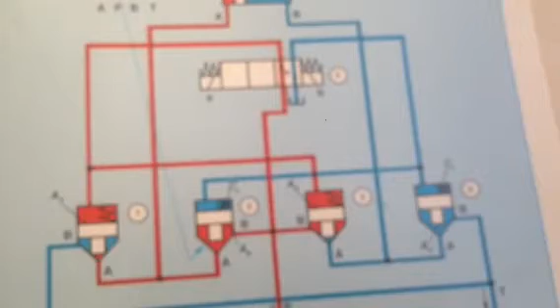Of the logic elements 1 and 3, which thus remain closed. The control areas of elements 2 and 4 are simultaneously connected to a tank via the pilot valve 5, and are therefore at zero pressure.

Now we are extending the cylinder using a single pilot valve. Before we have used several pilot valves. In this example we are only using one pilot valve.

The pressure on the annulus AB of element 2 moves the poppet upwards against the spring C2 and opens the flow path from B to A to the cylinder bore.

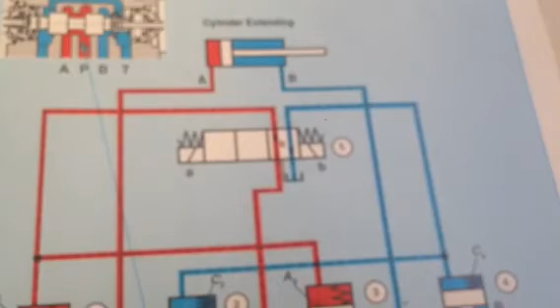The cylinder extends and the fluid flows from the cylinder annulus areas via the logic element 4, by opening the valve via area AA against the spring C4, to the tank.

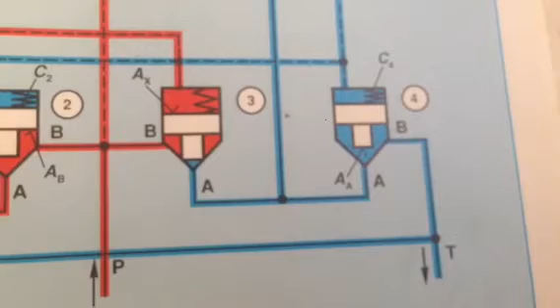If one once again makes a comparison to the directional spool valve, then the opening of the logic element 2 corresponds to the connection P to A in the directional spool valve, caused by the control land opening.

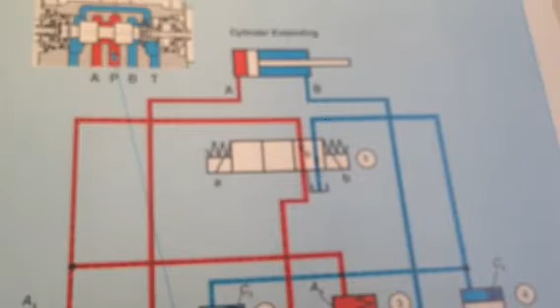Now this is the example of using a single pilot valve with 4 poppet valves, 4 cartridge valves, for the cylinder extension.

And furthermore, I'll give you some idea of the forces operating on the poppet of a logic element.

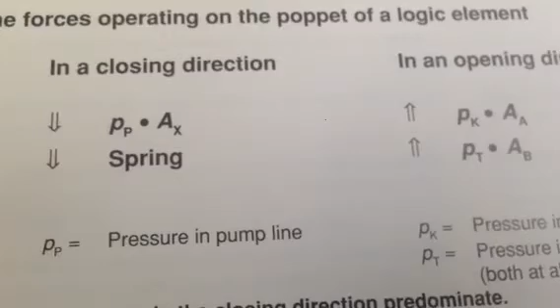In a closing direction: PP into AX, and spring. PP is equal to pressure in the pump.

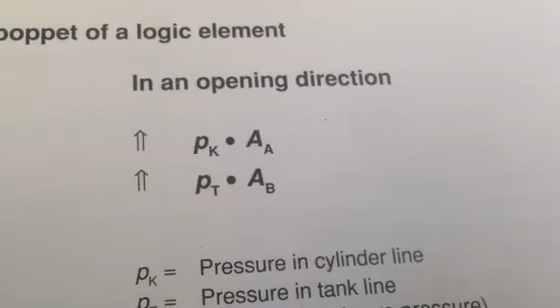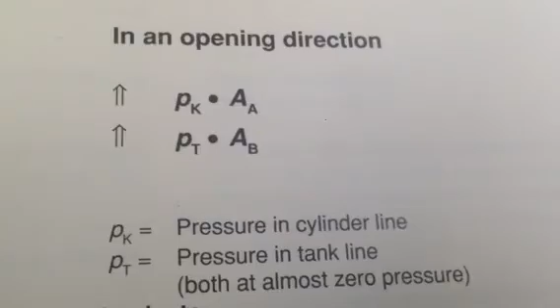In opening direction: PK into AA and PT into AB. PK is equal to pressure in the cylinder line, and PT is the pressure in the tank line, both at almost zero pressure. This will open in an opening direction, and this is in a closing direction.

PP into AX over spring, pressure in the pump line. Number 2, in a closing direction: PP into AX, spring over PP, pressure in the pump line, the forces in closing direction. In opening direction: PP into AB and PK into AA, PK at almost zero.

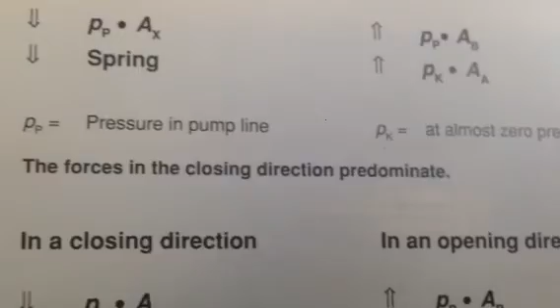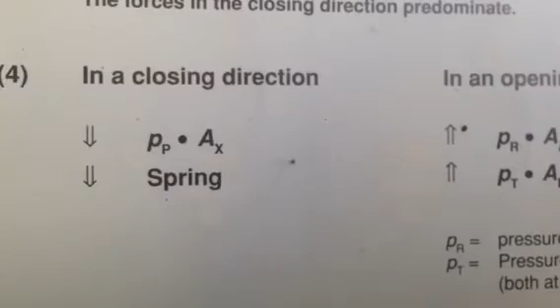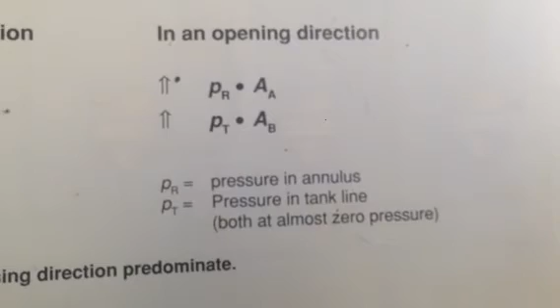The forces in the closing direction predominate. In closing direction: PP into AX, spring. In closing direction: PP into AX, spring. And in opening direction: PR into AA over PT into AB, pressure in annulus, pressure in tank line, both almost zero. The forces in the closing direction dominate.

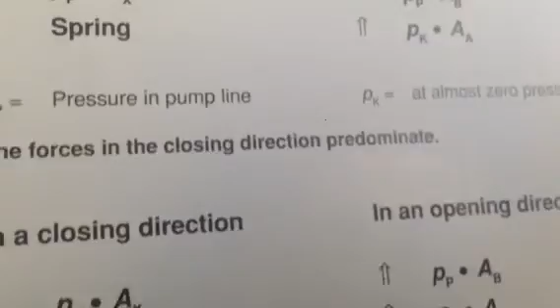Similarly, now forces in all these examples, the forces in the closing directions predominate.